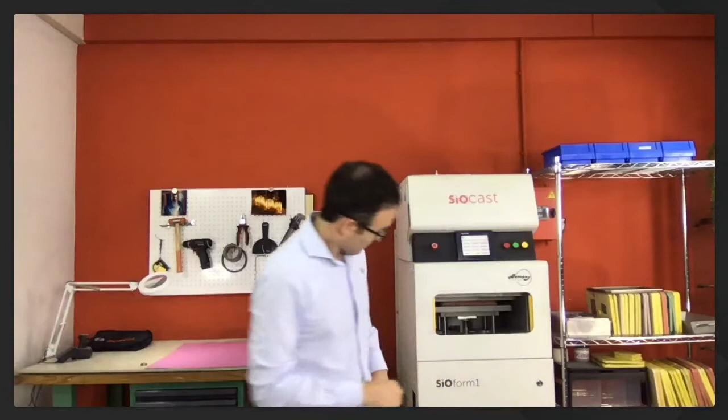Right now, we are doing the first shot. This is a coin mold, and we are doing something that people sometimes don't believe. We are doing injection molding in flexible silicone rubber molds. Okay. Let's see what happens.

Okay, so this is casting of the miniatures of the coin mold. You'll see now how it works. It's a little bit hot. Good. And you can see the casting here of the miniatures or the coins. It's quite hot still. Very fast, very economical.

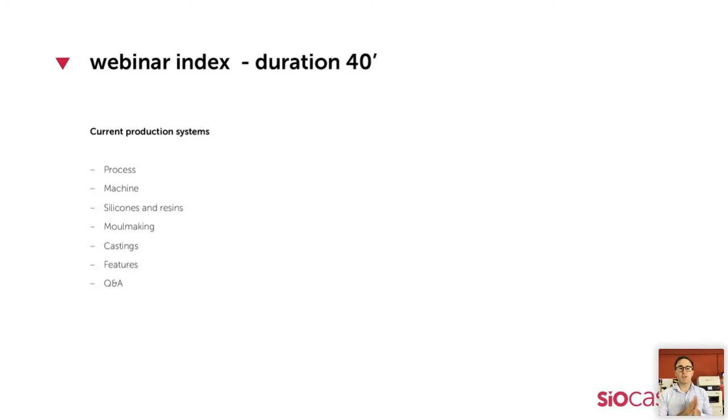So today our goal is to go through a little bit of the whole project. Let's start the presentation. Okay. During more or less 40 minutes, we'll go through the whole structure of SiOCAST. We want to explain the process, how the machine operates and works, and also we want you to understand what are the consumables that are needed to operate the SiOCAST process.

And there are a lot of questions about how we do the molds, how the mold making is performed, and we'll go through all the steps of the mold making process. We'll then do some castings. I'm sure that you want to see how miniatures are cast in the silicones. And we'll go through all the features of the system. And at the end, we will be able to answer your questions about the project.

Okay? So here is the most important question. Why SiOCAST? Why are we making injection molding in silicone molds? You may ask yourself, are we a miniature company? No. Are we a gaming company? The answer is no. We are a silicone rubber manufacturer. SiOCAST is a spin-off of Coniex. Coniex is a company based in Barcelona with subsidiaries in Portugal and also Mexico.

Coniex's core business and expertise is in manufacturing high-level and high-temperature-resistant silicones for the world of spin casting. Our customers are using our silicones for making miniatures, but also for belt buckle production and jewelry. The company has been selling silicones worldwide for more than 40 years, very specialized silicones that are able to withstand high-temperature applications.

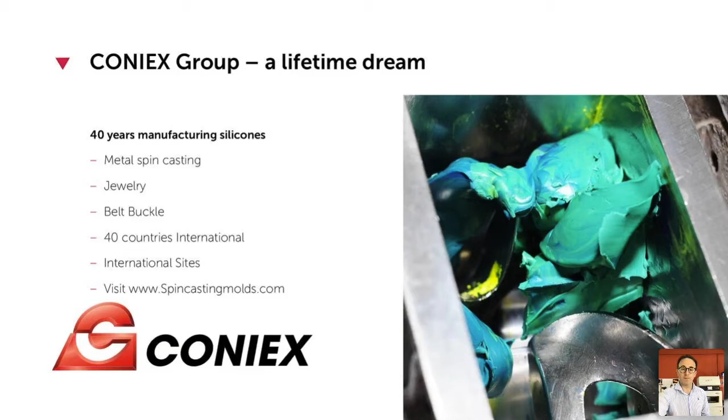So let's see how silicone manufacturing works.

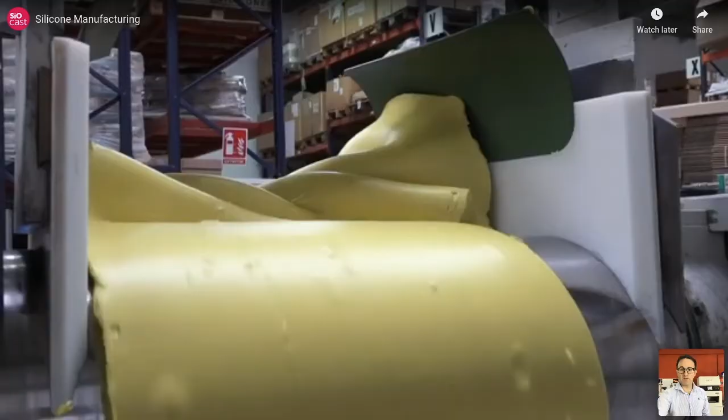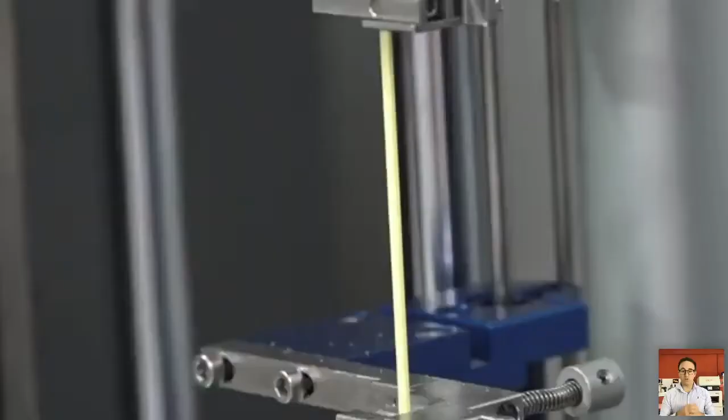As I was telling, Coniex is a silicone rubber manufacturer. Everything is done in-house, from the design, the R&D, the manufacturing of the elastomers, also the testing, the QA, the quality assurance. Everything is proprietary to the company, and we have lots of flexibility and manufacturing capacity for making silicones. So when we came to SiOCAST, we understood that this application of plastic injection inside silicone had lots of advantages for miniature manufacturing.

This sector has used spin casting as a way of creating miniatures. At the beginning, they were made of lead. Then lead became forbidden for safety reasons, and then we started manufacturing with tin alloys. But then the price of tin went really high, and other technologies have emerged for making miniatures. We also have resin spin casting. That is a system which is very time consuming. It's very aggressive for the molds, and also very slow and toxic.

We also have vacuum resin casting, the hand pouring or pressure pouring, that gives you very high detail on the part, but it's also very slow. The molds are going to last between 20 to 40 castings, and it's a brittle material with not a lot of flexibility, and quite toxic to operate.

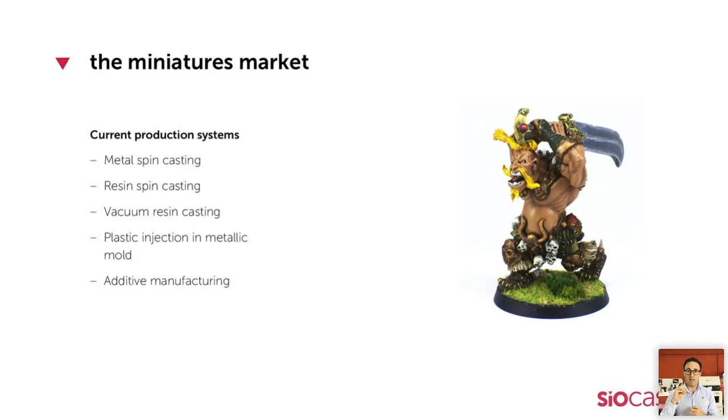And in some cases, when you work with PVC or ABS, the quality that you get is not the same quality that you would expect from resin castings. Okay. Also, there is additive manufacturing that is coming into the market, which is a very nice solution, but it's still very expensive for very limited runs, requires a lot of time for cleaning the parts, and the resins that are available at the moment are not very long-standing. So here is where SiOCAST really comes through. It's able to solve the major problems of all of those technologies, and it's bringing that into your factory.

Okay, so we have the advantages of injection molding: we are pushing the resins inside the mold, a mold which is flexible, that is going to be able to have very high undercuts, and we can have a level of detail on the parts that will not add any cost to the manufacturing system. You have the same level of quality that you have in resin casting, because silicone is going to copy all the details and intricate fine nuances of the models and the masters that you are using for making the mold.

Okay, so at the end, with SiOCAST, what we have created is a new process. This is a process that has never been done, and we had to design everything from scratch, but taking a lot of support from the other technologies. In order to make the manufacturing process, we start with the 3D design. You also can use, as always, hand sculpting with green or putty. And here, what we have represented is how straightforward it is to manufacture with SiOCAST. You start from the 3D design, then you 3D print. As I said, you can also use standard masters like metal masters, not only 3D printing.

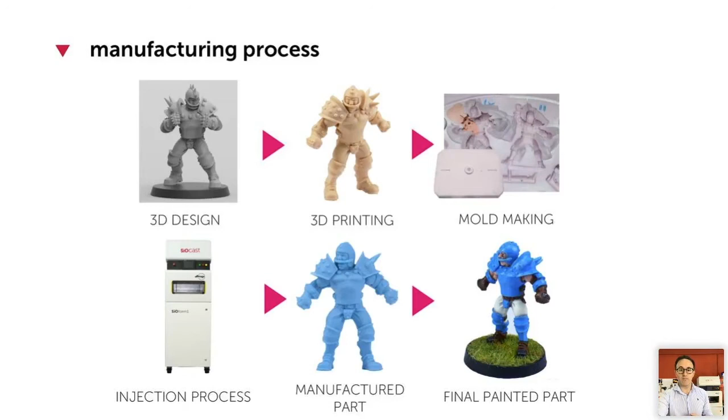After the masters are created, then we make the molds. We are going to see that later in the explanation, with a short video of all the steps that are needed to make the molds. And once the molds are done, which require no more than 4 hours of overall task, then we go to the injection process. The injection process is going to be very straightforward. We'll talk about productivity, but you can do up to 40 castings an hour with the machine, and you will get finished parts that you can already deliver to the customers.

In order to create SiOCAST, we had to create 3 pillars, because everything is important here. We need a special machine. This is the SiOform1 machine. It's a custom design, and the injection process that we had to create in order to be able to perform this application.

I would say that the most critical thing here was to control very precisely all the injection steps, and more important, the pressure of the resin inside the mold. The other pillar is the plastic. It's a material that has never been developed in the thermoplastic industry, because the properties that it has are really special. They are the ones that we require to perform the injection with the right pressure, the right fluidity, and in the correct way in order to fill the cavities and copy all the details of the silicone molds.

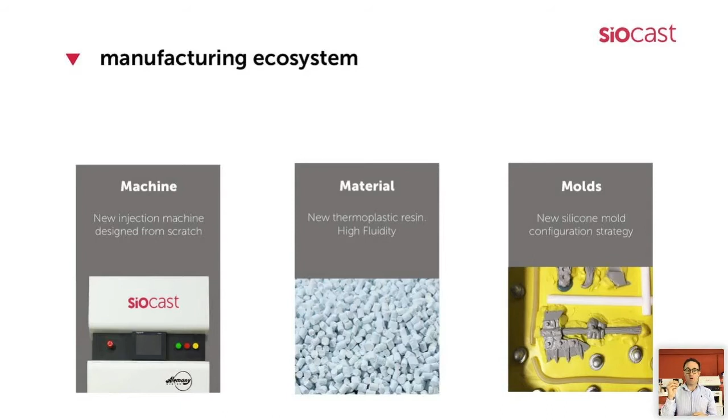The other pillar of the project was the molds. Let's say that for us it was the easiest part, because we are silicone rubber manufacturers, and we know exactly how to create the molds and what type of properties we need to manufacture. But here we had to change the mold making strategy. It's different from injection molding. It's different from spin casting, and we had to create a new technique in order to make the process work.

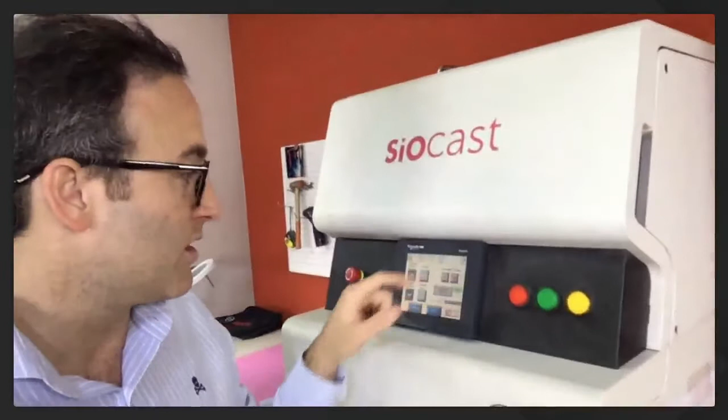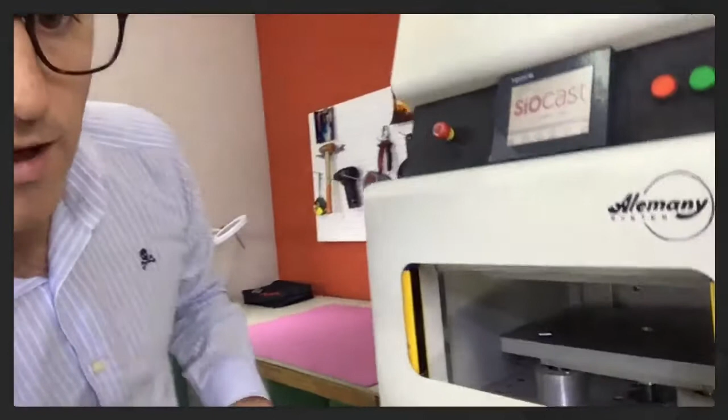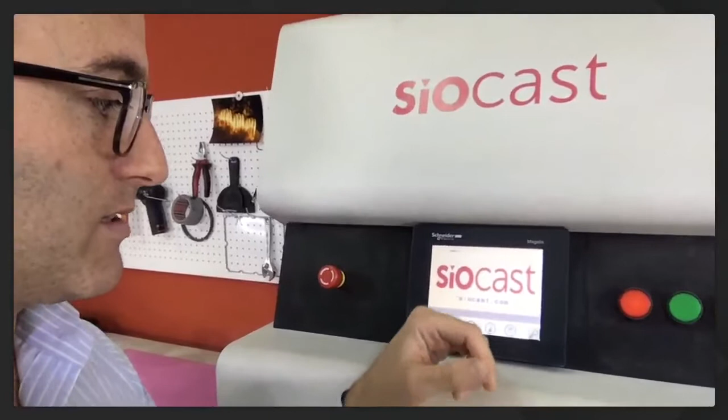And what you can see here is that the machine has on the top side the injection module that is going to produce the injection process. We load the resins on the top, and we have, as you can see here, a PLC that can control precisely all the machine parameters. Here we have the injection area, and in the back part we have all the pneumatics and the electrical cabinet. It's behind the machine.

Okay, here what you can see in the machine PLC is that the machine can work with recipes. That means that you can store all the injection parameters of every mold into the machine. The machine can store more than 5,000 different molds that you can have sitting on the shelf. And when you pick a mold that is already set up into the machine, you will be able to simply press a button, and the machine is going to make the right injection process. As you can see, the machine also complies with all the safety standards for CE and also UL norms in terms of electrics.

Okay, 1 second here. So, let's put everything back again.

So, in order to have the machine, you only need compressed air in the factory. You will also need a vulcanizing press, and the machine is 4.0 prepared. That means that it must be connected to the internet in order to operate and have software updates and improvements online. Okay, let's start again.

Okay, regarding the resins. This is a very important aspect of the project. You can see the resins here in the camera. They are supplied in the form of pellets. As people are saying on the social networks about the products already released on the market with SiOCAST, people are in love with this resin because it has slight flexibility, but the material is still stiff. It's light, so compared with other technologies, it's a light material. You can have infinite level of detail on it.

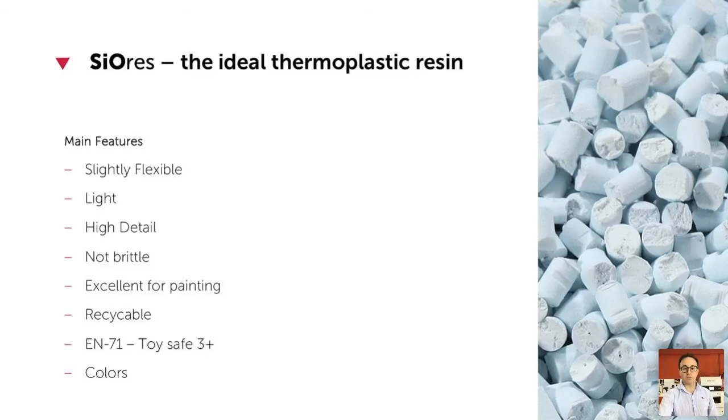Okay. Finally, you can see here the SiO mold. The SiO mold is the silicone rubber, and it's a HTV silicone rubber. It's not like the liquid silicone. That means it's a solid silicone. You can see it here that we supply it in laminates. This is a solid silicone. It has a putty consistency, and this is the silicone before vulcanizing.

This silicone is extremely performant. We can do between 300 to 500 castings with every mold. That means that it's more than 10 times the life expectancy that you have with other silicones for vacuum casting or resin spin casting. When we talk about 300, 500, it depends on the level of complexity of the parts; you may have over time a lower life expectancy of the mold. But in general, we can see between 300 to 500 castings, okay?

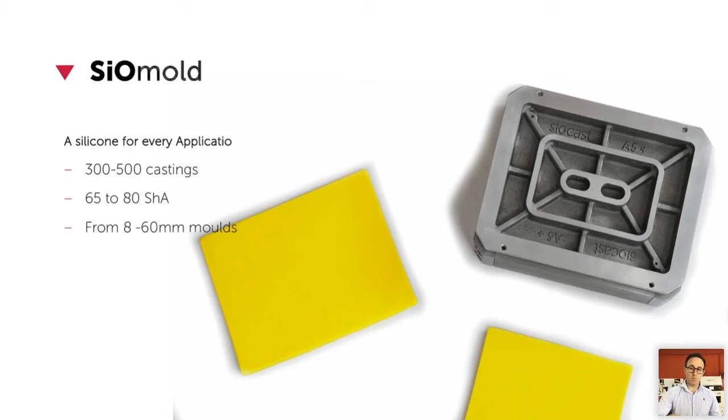And we also can supply different types of silicones. Here, I will show you the differences. The mold that you were seeing before of the coins, this mold, is 80 Shore A flexibility. It's quite stiff, and this is suitable for flat parts or parts that don't have heavy undercuts.

This silicone is 65 Shore A. It's a much more flexible silicone. That means that you can cast much more complex parts that you will be able to remove from the mold more easily. Also, we can supply other types of silicones, you will see in the video in the next presentation, that are able to prevent detaching or tearing of the silicone in very complex areas. Okay.

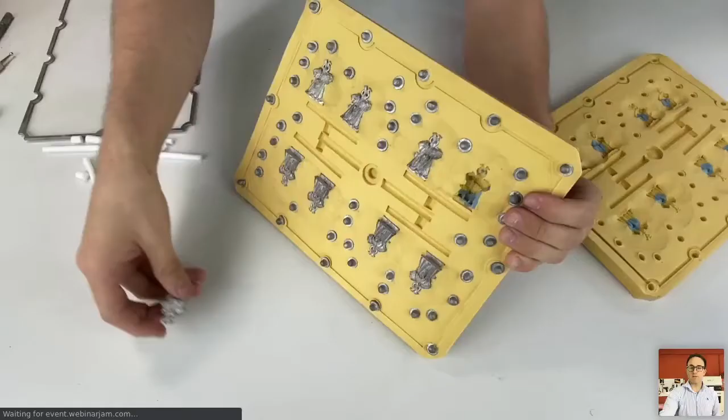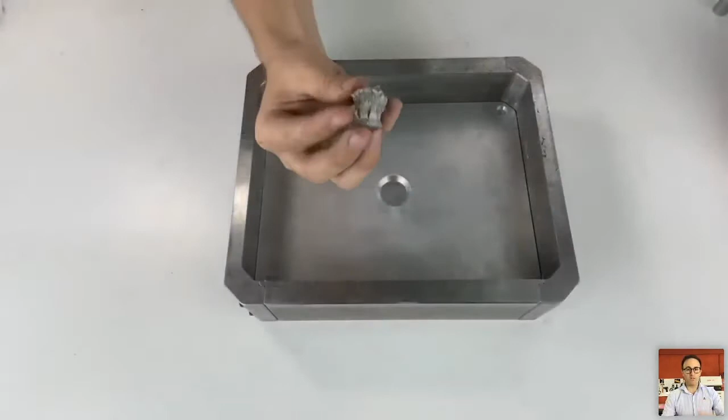Now, let's see how molds are made. Okay. So here is an example of mold making, one of the molds that we are going to cast. Those are the masters. There are 8 metal masters from a collection. And you can see here the mold frame. Those masters are 20 millimeters thick. That means that we will use a 28 millimeter mold, which is 2 sides of 14 millimeters.

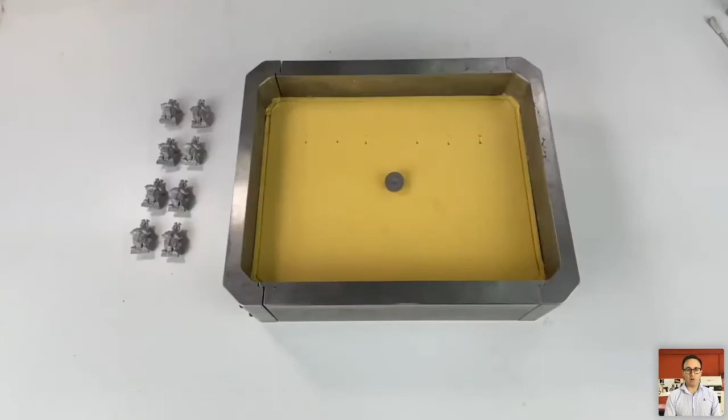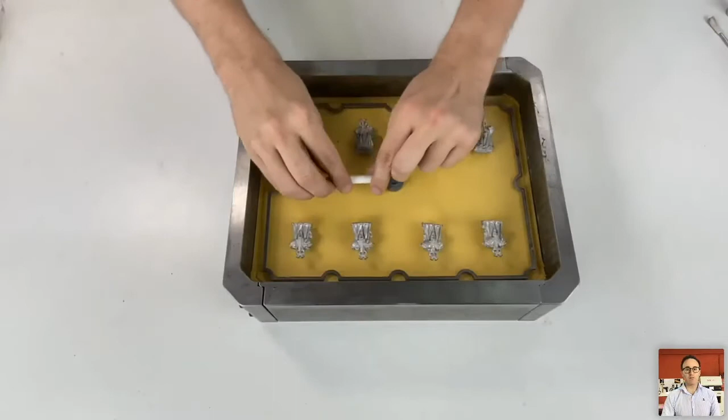Here you can see the texture of the silicone that we need first to put on the metal box, the vulcanizing frame, that then is going to go to the vulcanizing press. The first thing that we do is place the external frame for the vacuum channel. We start placing the masters inside the cavities in order to distribute the layout. And then we can already start putting the runners.

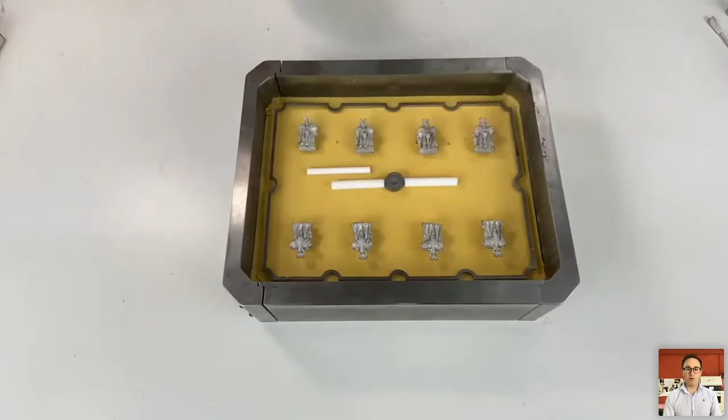In that case, we are using Teflon rod runners that you can put very easily to make your own distribution. Those Teflon rods, we supply them in different thicknesses and sizes, and they are very useful to make modular runner buildings. But we have many customers with very standard geometries that are doing their own runners with 3D printing, and they can use those preforms in every mold, saving some time.

As you can see here, we are using metal masters. They don't require any releasing agent. The metal masters you can already put into the silicone. We don't have any issues for the vulcanizing process. But when you are using 3D printing resin masters, you definitely want to use a special releasing agent that we supply, specially designed to prevent those resins from sticking to the silicone. If you don't use it, you will not be able to remove the masters after the vulcanization process.

Once the masters are allocated, we are going to use this type of blue silicone in those special cases where we have very complex parts and geometries. We call it the high tear silicone. This silicone, as you can see here on the top left corner, is a very special silicone that has a lot of elasticity. It's going to prevent the silicone from detaching or breaking when you are stripping the parts from the mold.

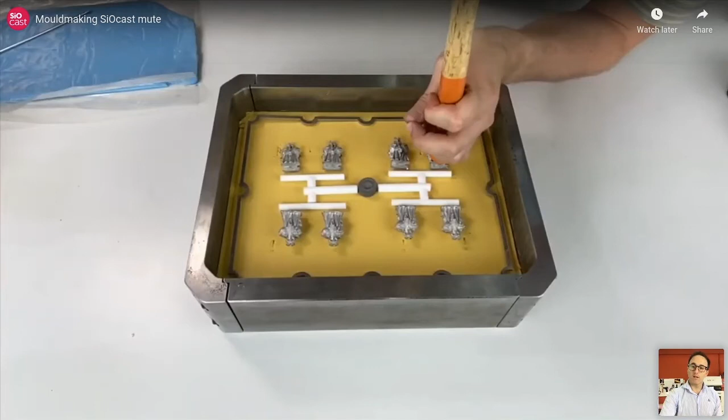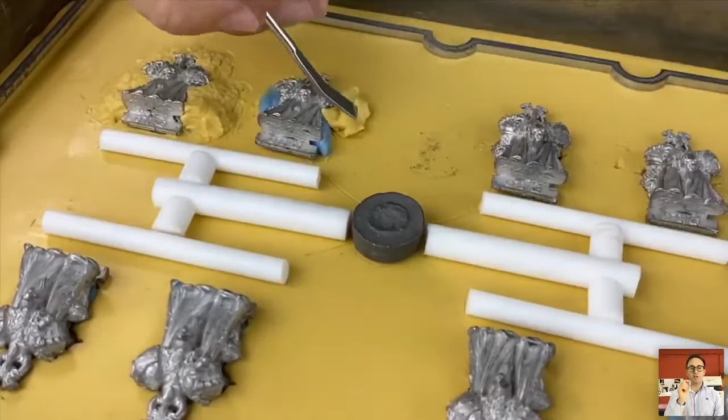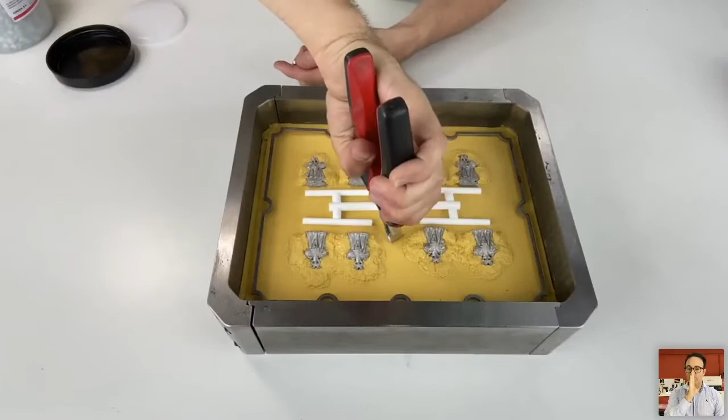Okay, so once all the miniatures have their silicone, we firmly press them into the base mold, and we start adding more silicone, because here we want to bring the molding line where we really want it. We want to prevent the molding line in delicate parts of the miniature, like the front of the face. We want to bring the molding line to the sides of the cape or behind the ear of the model. Finally, when this is done, you can see all the parts. We add the centering studs.

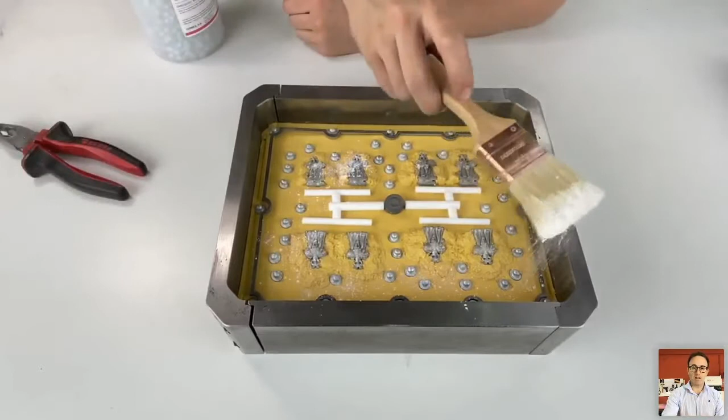You can see here that the centering studs are metal pins that we supply that are going to attach both sides of the mold so they cannot move, and you will have very few molding lines during the injection process. These studs come in different shapes that we can supply depending on the use, but they are very good in order to firmly fix the mold during all the process.

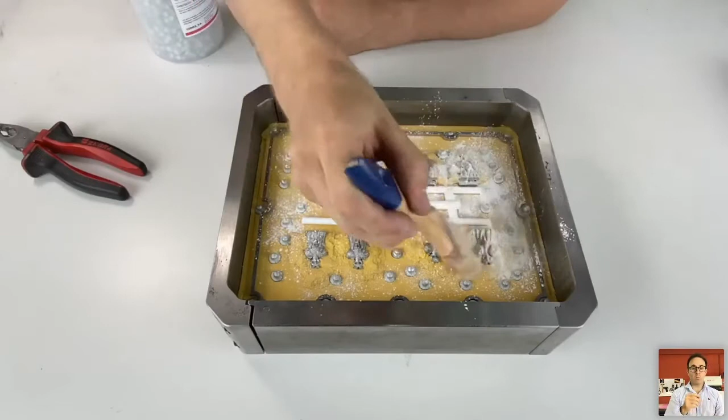Before closing the mold, we need to apply a releasing agent, talcum, that is going to prevent the silicones from sticking together. When you don't use any releasing agent, the silicones merge together, but here we use talc. You can see that we apply it with a brush, and then we remove the excess with a blowing gun. Finally, we close the top lid of the mold.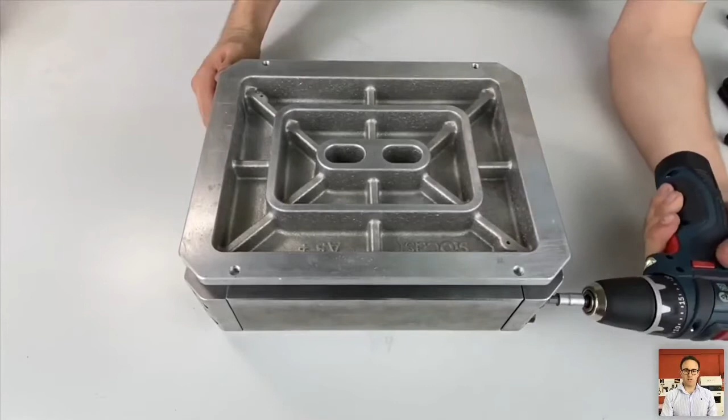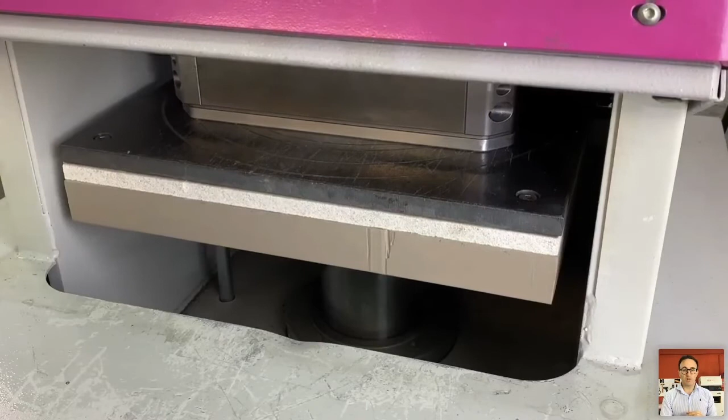We close the molding frame, and we tighten it very tight, you can see, with the nuts. This molding frame is specially designed for the machine. It will build all the centering geometries that the molds need to go into the injection machine. And we go to the vulcanizing press. This vulcanizing press is standard equipment on the market.

We are cooking the mold here for more or less 1 hour at 120 degrees Celsius. When the process is done, we let the mold frame cool down, because if not, it's too hot, and we open the mold with the tool. We remove the frame, and then we already have the mold vulcanized.

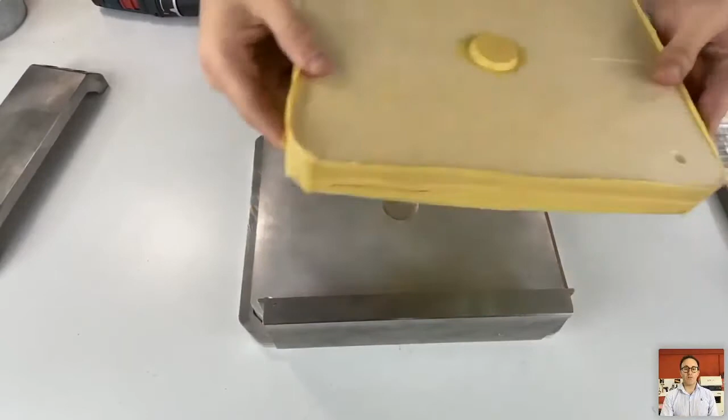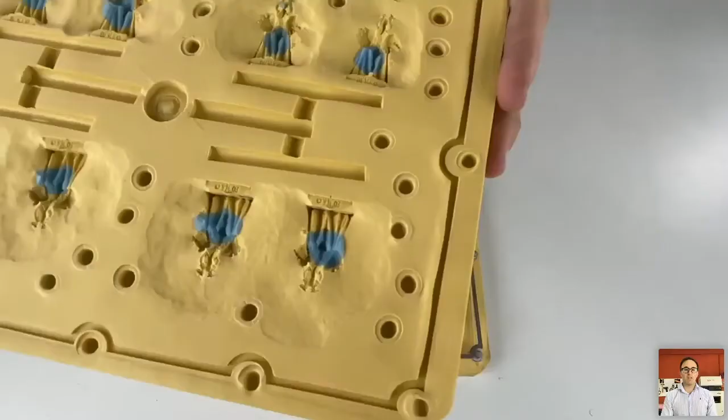Next step is going to be to open the vulcanized mold. You can see now the rubber has this solid texture that you would expect. And you can see that the cavities are already made. We need to remove the runners, the masters, the vacuum channel frame, and all the cavities are done. All the cavities with all the detail of the masters.

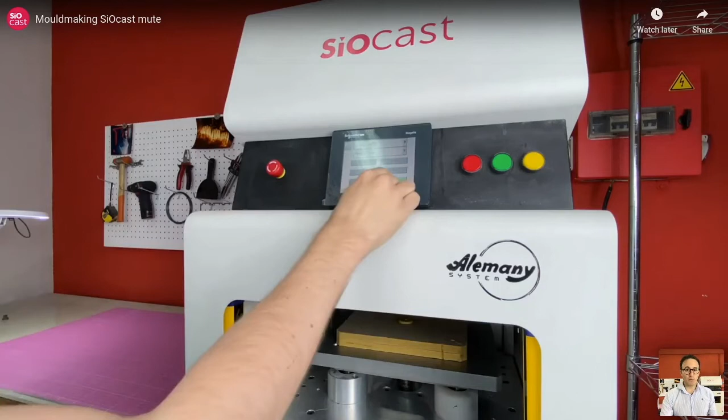Okay. Next step then is to open the gates of the miniatures. This is a trial and error procedure. At the beginning we are doing the gates by trial and error. All this is a technique that we train during the training program when you buy the machine. It would require several iterations in order to have this set up. Once this is done, we need to open the gates. We need to open the air vents that connect the cavities to the vacuum system.

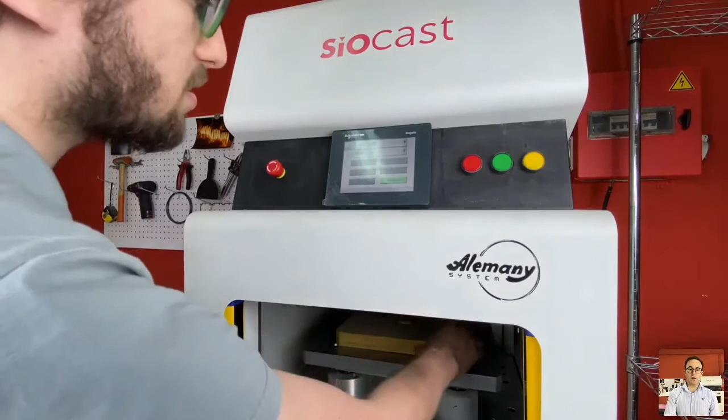We put the mold into the machine. We start with basic settings that are going to be very safe. And here, this is the live process of the first injection that is going to happen to this mold. And you can see here the unbalancing. The first shot is never going to be okay, of course. You can see some cavities already 100% filled, others like 20%. Others didn't have any material.

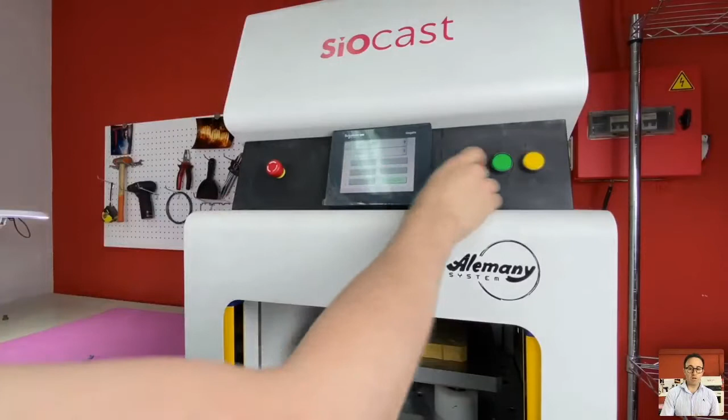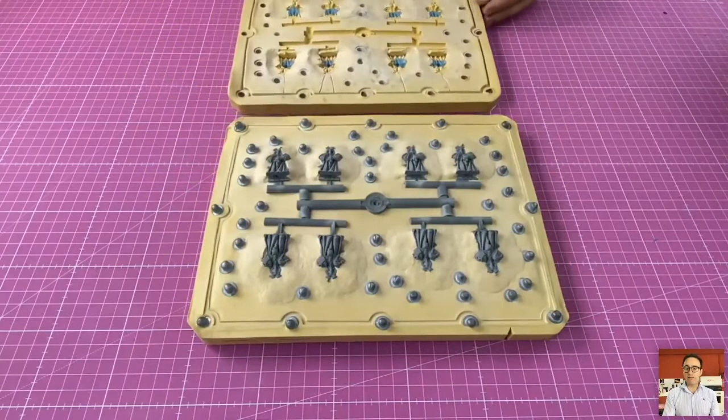So here, with the technique that we teach, we start to proceed with opening the gates or playing with the injection parameters until we have the mold set up. Depending on the skills and part complexity, this would take between 5 to 15 castings. So in less than, let's say, 1 hour, you already have the mold perfectly balanced and ready for production. You can see here that this mold, after 7 shots, was perfectly set up.

As I said before, the injection parameters are already stored in the machine. You don't need to do anything else. Maybe sometimes you need to make some adjustments depending on the temperature of the mold or the silicone, but you can see here that we have an exact copy of the master, and you can see that the resin will look even sharper than metal, because metal is shiny, and you don't see all the details, the small nuances or the shadows of the model.

Good. So this mold making process is a skill that we need to train. The training on the machine is normally 3 days, and now with the current situation we are doing the trainings online, but this is something that you can master more and more. But after 3 days you get all the skills in order to start your manufacturing production without any issues.

Okay. When we talk about the molds, I like to highlight that we can play with different thicknesses of molds, from 8 millimeters per layer, up to 60 millimeters thick molds. That means that you can make parts from very thin walls, like 1 millimeter, up to 40 millimeters thick, like thick miniatures, which is quite a lot.

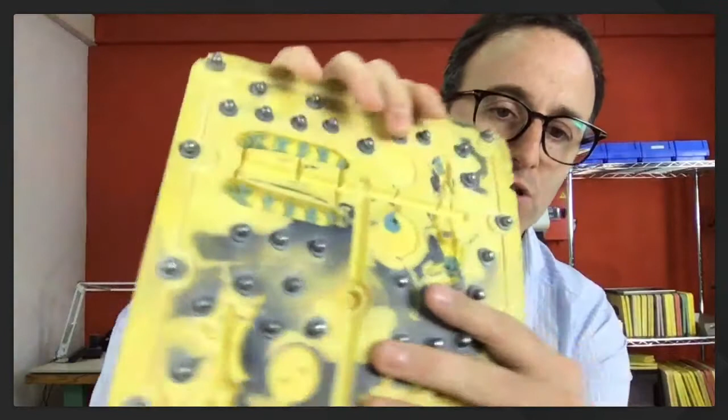While this injection is done, we can already prepare the next mold. As you can see here, this mold is a demo mold with several types of miniatures - we have miniatures, bases, and tank tracks.

Some of these molds require a little bit of releasing agent before casting. I already applied it - it's talcum, the same as in spin casting. We sell and supply this type of industrial talcum for these applications, and as you saw in the mold making procedure, it's going to be the same type of activity.

When you are into production for SiOCAST, normally you can have only one person here in the factory, or you can even have two. Depending on the speed and thickness of the parts, you will be able to do between 20 castings an hour, or up to 40 if you have 2 persons operating the machine. Normally, one guy is applying the talcum, closing the molds, and operating the machine, while the other is opening the molds, stripping the parts, and making a small quality check.

As you can see, I simply introduced the new mold, selected the recipe, and the injection process is done. You can see here, the casting is done, and now you can start stripping the parts from the mold.

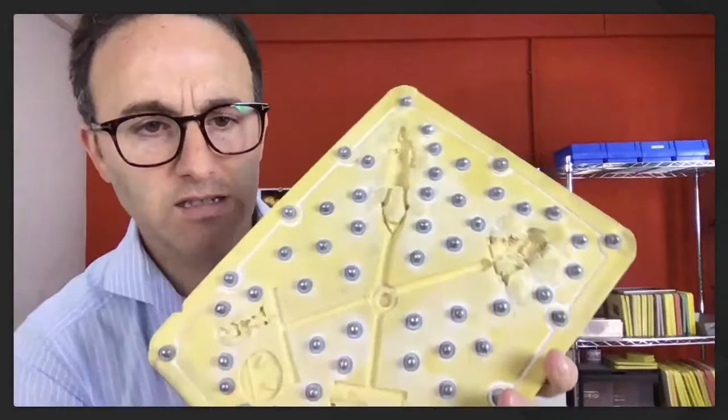You can see that we have the sprue here. Now this mold is finished, and we are going to cast this other mold, which is a sample mold with different parts. You can see a 75 millimeter miniature like a dwarf, also warriors and bases.

You'll see it's not been cast - I pressed the wrong button, sorry. So all in all, what you are having is a very fast productive process. When you're into production, the only thing you need to take into account is to prevent the silicon from heating up. This is why normally we rotate different types of molds, so that we let them rest a little bit of time in order that the heat doesn't build up.

It happens the same as in spin casting - when the silicon is too hot, you can have flashings or miscasts because of the temperature.

Here it is - we will let it cool a little bit more time, this one, because the parts are thicker. I'm going to cast again this one. Here we have it.

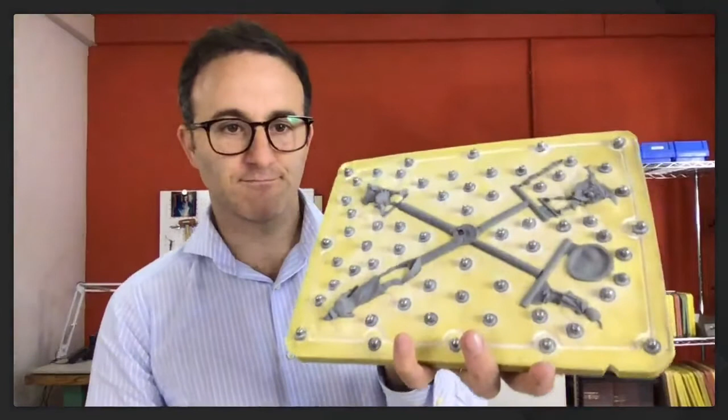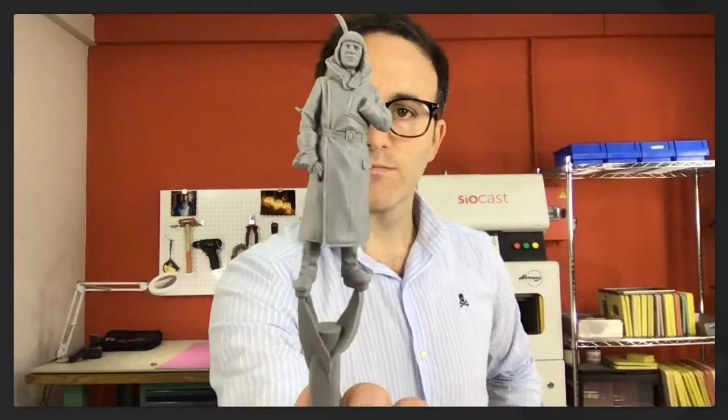Maybe it's still too hot. You can see here, the miniature, or this pilot. Okay, this mold is already done.

Here we have it. As you can see here, we have the technique of making the miniatures in a small sprue, where you simply remove this part from the mold and put it already into the box. We have here also some tank tracks, or miniatures with their own bases, into the mold.

Let's start again with the presentation. What you have seen here is what features bring advantages to those miniature manufacturers.

SiOCAST brings you lower costs - a very important lower cost of production, because when you compare it with metal production or spin casting, you will see that the density of the resin is 7 times less than the density of metal. Also, you get lower costs against resin casting because you have 10 times faster productivity, and also over 10 or 20 times more lasting silicons. You need to understand how much time you will save making silicon molds when using SiOCAST against hand-poured resin.

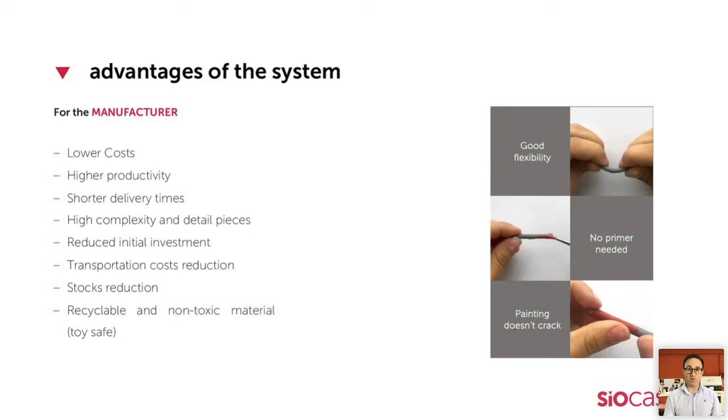So what is your customer going to receive? They're going to receive parts with far better detail than other technologies. As I said before, when we compare metal against resin, you can see much better detail on the resin cast than on the metal cast.

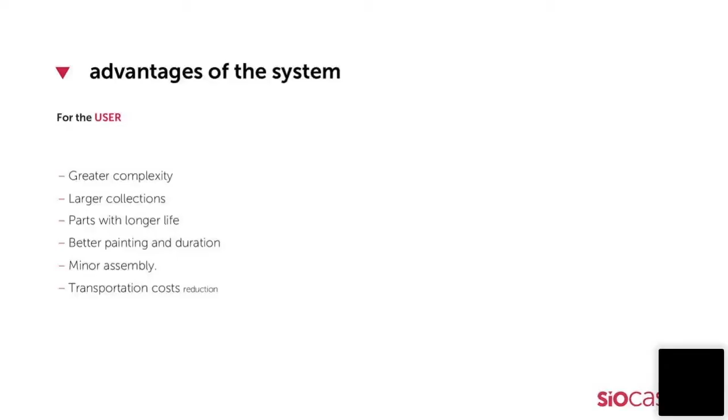As the manufacturing costs are quite lower, you can even sell more miniatures at the same price. So people will accept your products better because you can deliver more miniatures for the same investment. Also people are loving the flexibility, which means the parts are going to last longer and the paint is going to adhere better. Even if you bend the painted parts, the paint is going to attach - it's not going to break or peel off, as happens with resin, metal, or HIPS.

So this has been very well received. The miniatures around the market, and the companies selling their products with SiOCAST, are very, very happy with the feedback from their customers about the painting capacities.

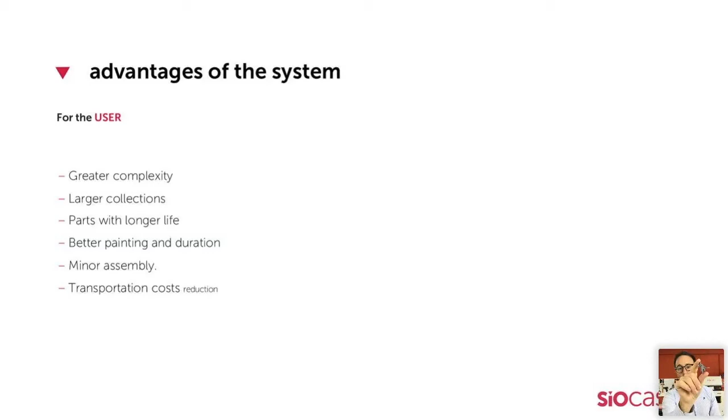And thanks to the undercut, you will be able to make much more robust parts that don't need so much splitting on the steel molds. That means less time for assembling.

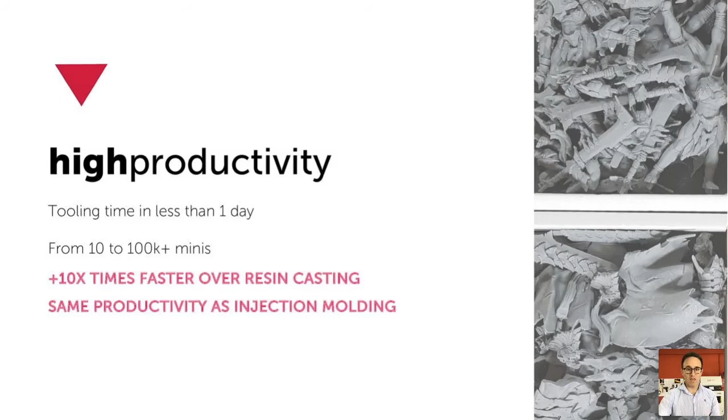So all in all, as a final resume of what we're saying in SiOCAST: we get high productivity, you get the tooling in less than 1 day, and you can make any collection from some dozens of copies to 100,000 miniatures. It's over 10 times faster than resin casting, sometimes even more, and we can compare the productivity to injection molding. As for detail, you get all the detail you get with high-end quality resin casting, with lots of details you don't have with injection molding.

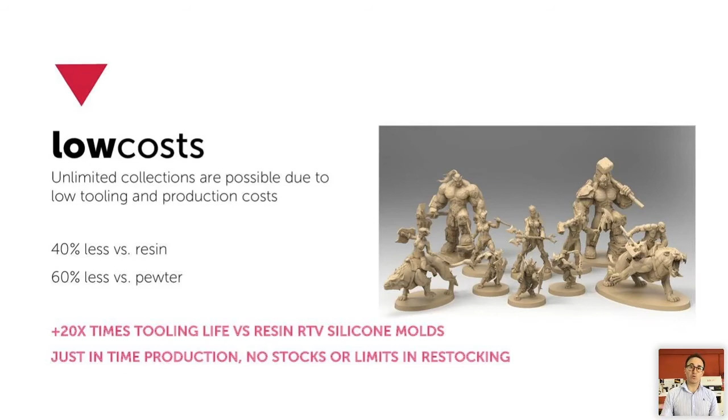And here there is a small video we want to share to transmit this information of why this is cheaper than metal.

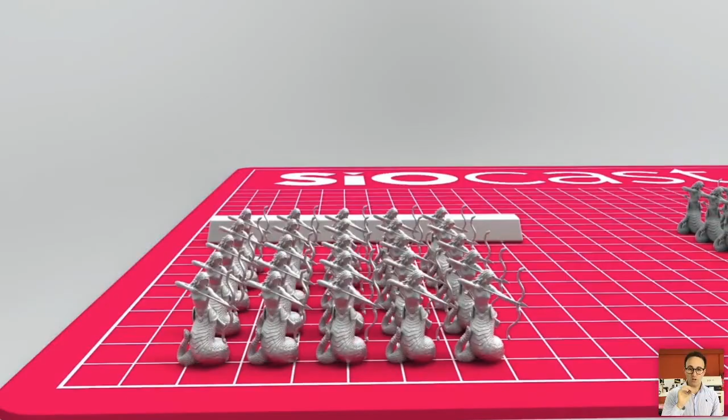This is a 1 kilogram pewter ingot - you can make 45 miniatures with it. This is 1 kilogram of resin - with it you can make up to 335 miniatures. This is where the difference is, because the density is so different and the weight is so different that with 1 kilogram of raw material you can make up to 7 times more production.